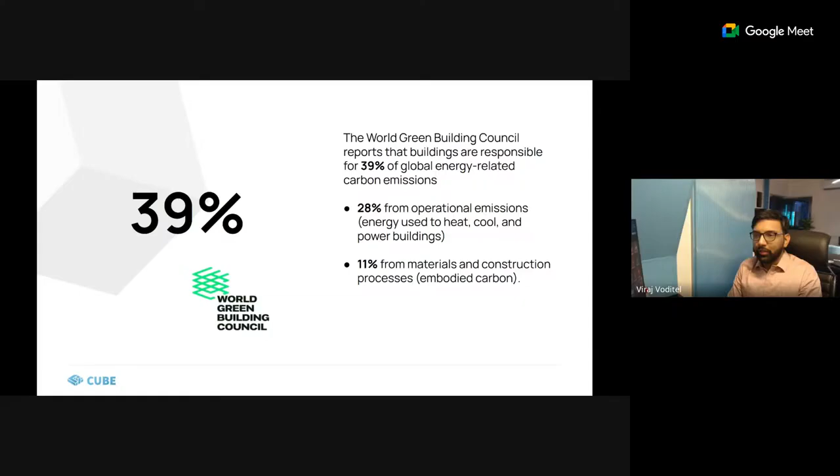So we'll be looking at both these aspects and what role BIM and CDE can play in all of this. So what tools like BIM really help you do is take a data-driven approach. Like we already looked at, the major contribution is happening from this particular sector, and unfortunately, this industry is one of the least digitized. In fact, it's the second least digitized, only after agriculture.

So when we look at some of the emerging technologies, like artificial intelligence, for example, which build upon existing data sets, one of the things that's really lacking in the industry is having vast sources of data. And one of the fundamental reasons for that is the processes themselves are not that digitized. We'll look at both BIM and CDE one by one, but both of these are essentially pointing towards one thing: how we can take a more data-driven approach to this entire challenge and the impact on the environment.

There are of course various ways to measure it, and the end goal could be to make it actionable, just like we measure costs. So I like to relate the impact on the environment also as a cost. When we look at any typical construction project, we are always concerned about the budgets and the monetary impact. But one thing we fail to realize most of the time is the impact that the project is going to have on the environment. So if we look at what cost it has on the environment and make it actionable, that's when we'll really be approaching things from a data-driven mindset.

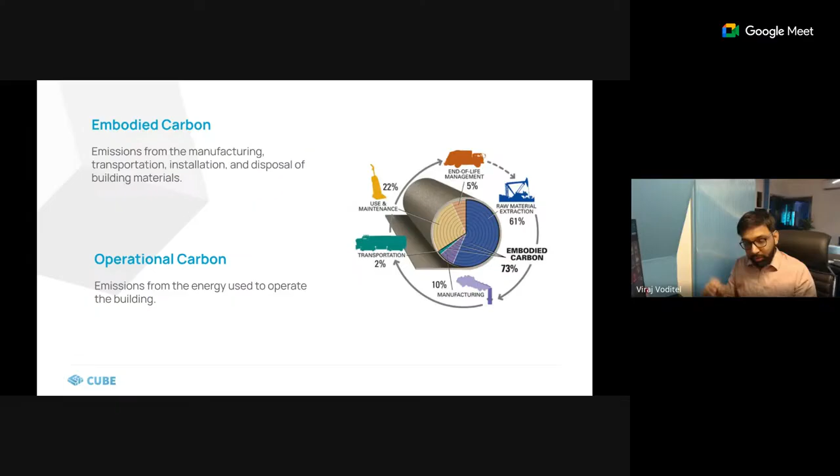It's everything that we call the built environment, and the built environment is everything that is not the natural environment. So anything that is part of the built environment will have similar impacts. So you see the contribution here is lesser from operational carbon and higher from embodied carbon, but if we look at the timeline, operational timelines are definitely much larger, and with more technologies coming in, and people wanting more air conditioning and more electricity usage, the operational phase also definitely has significant impact.

So we can represent the entire life cycle of a project, or how materials get used right from the start to the end. So I thought that this kind of an illustration will really help you visualize that.

There are also certain technical ways to divide these phases, and there are different standards. I'm sure there have been other talks over the past few days that have talked about some of these standards. There are various ISO standards as well. I'll not go into that. I'm just touching upon these so that this builds into the foundation of some of the later concepts that we are going to talk about, BIM and CDE.

So yeah, right from the starting of extraction of raw materials, then transportation. So the transportation and construction could be directly to the site in case of in situ materials. It could be to the factory where manufactured products are getting created, or any prefabrication is happening, for example. So there is a process around that that's happening. Then you have transportation to the end site.

Then you have the actual construction process, which will again take place for quite some time. And these materials are getting procured, these are getting manufactured. Everything is happening in parallel over here. So these are not necessarily sequential steps that are happening. And then, after this particular phase, you have the usage and maintenance of the facility.

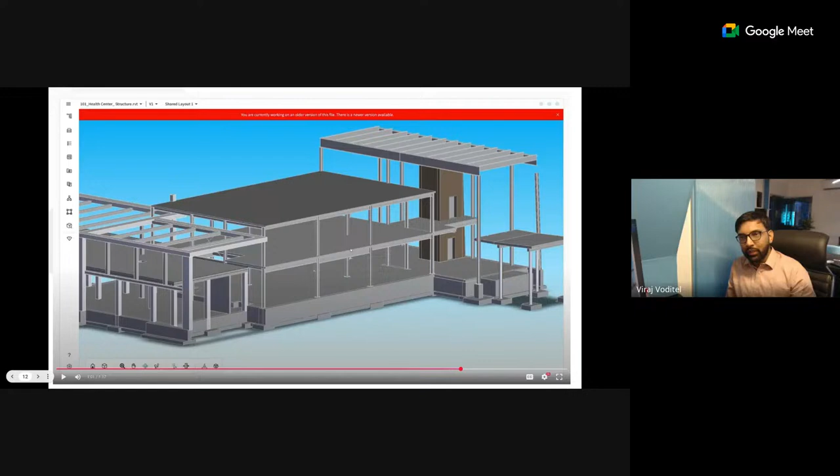The thing that I'm pointing out here is that a common data environment needs to be agnostic. So what that means is that irrespective of what kind of file someone is working with, they should be able to share it with another stakeholder. And nothing should be left to assumption. Things should get translated, be it the model geometry or be it the data that is inside the models. So typically the common data environments which are used in the architecture, engineering, and construction industry should be able to directly visualize these kinds of file formats that are popularly used in the industry.

Okay. Yes, so we can orbit around in the model. We'll look into a bit more details of what more can be done within the common data environment from a BIM perspective very shortly. So let's move on to concepts of BIM. Then we'll dive a bit deeper into how these things talk to each other, how these things are actually integrated.

Again, I'm sure all of you know what BIM is. So BIM stands for Building Information Modeling. Sometimes it's also referred to as Building Information Management as well, depending on what context you read about BIM. It's also referred to as Building Information Model. So, a 3D representation of a project which is information rich. That's what is called a building information model. So it's not just a 3D model.

We've seen 3D models since ages, but the concepts of BIM really came to the fore when the information associated with each and every object in the model got embedded inside these 3D objects, and we had those technologies and software that really helped us do that. So some of the popular tools out there to help create BIM models would be Revit. Revit is a popular example. There are other tools like ArchiCAD. There are various other tools for structural detailing, like Tekla Structures, and so many other tools which essentially help in creating these BIM models. And again, it could be a representation of any construction project.

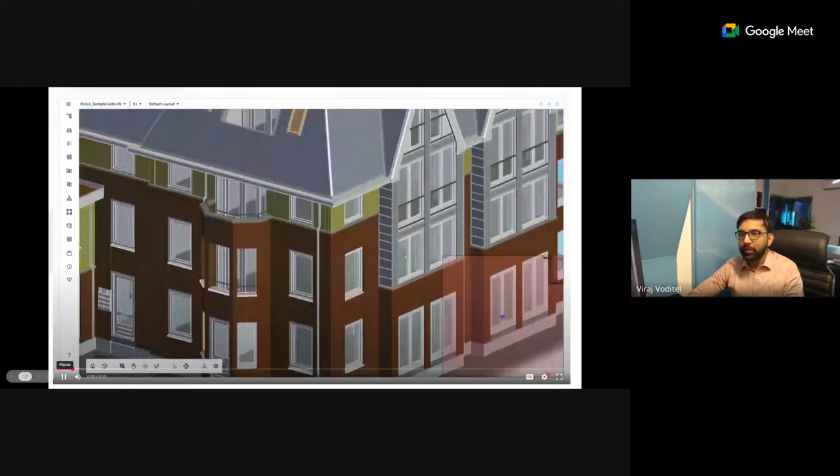Okay. So we look at how all of this information can come together in a common data environment, how we can assimilate things from different sources, and then how we can use that to measure the impact on the environment. So let's look at that through this particular video here. First we look at some of the BIM related concepts. This is a 3D model. As you can see here on the top, it's a .ifc file, and we can zoom in, zoom out, we can orbit around, we can walk around as well.

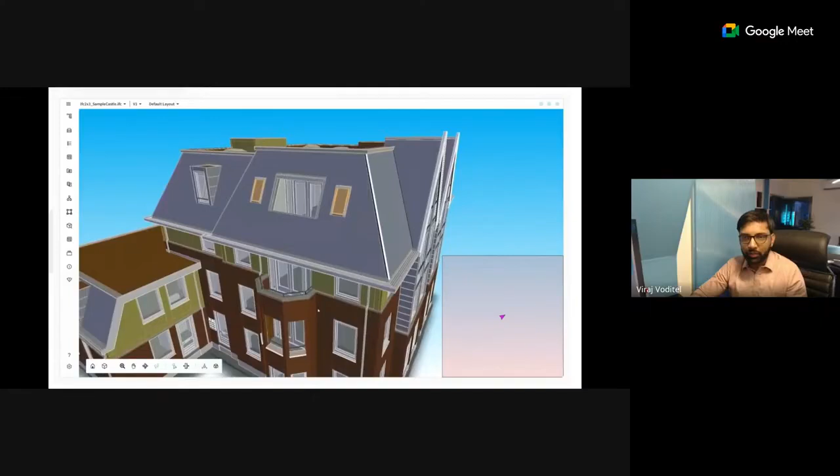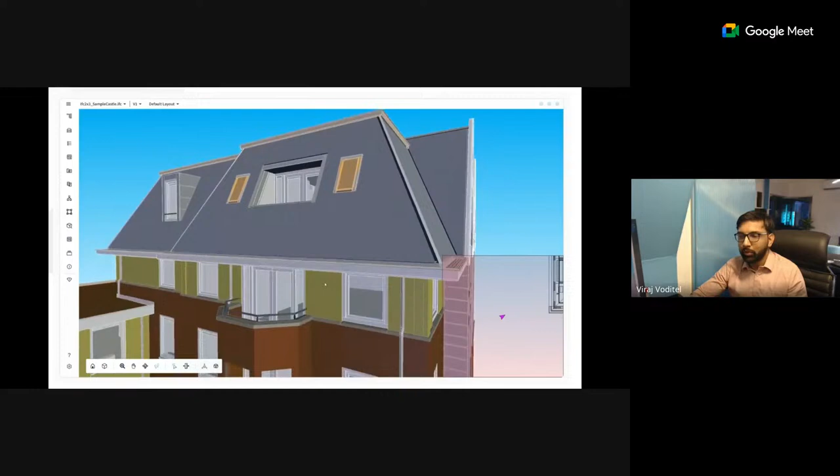This is a very fundamental set of features of what a BIM model looks like, or how a BIM model can actually be navigated around. Just like a video game, you can walk around a project or a design of a project here. Now, these models could possess various different levels of detail, and you can do the estimation of embodied carbon at different stages of the project as well.

What we are looking at here is that we've selected a particular object in the model, and all the information, or you can call it the metadata of that particular object, is directly accessible to us. So you can see things like lengths, areas, perimeters, gross surface area, wall skin thicknesses, so many different parameters that can be modeled inside a 3D model. And a lot of these numbers that you see here are numeric.

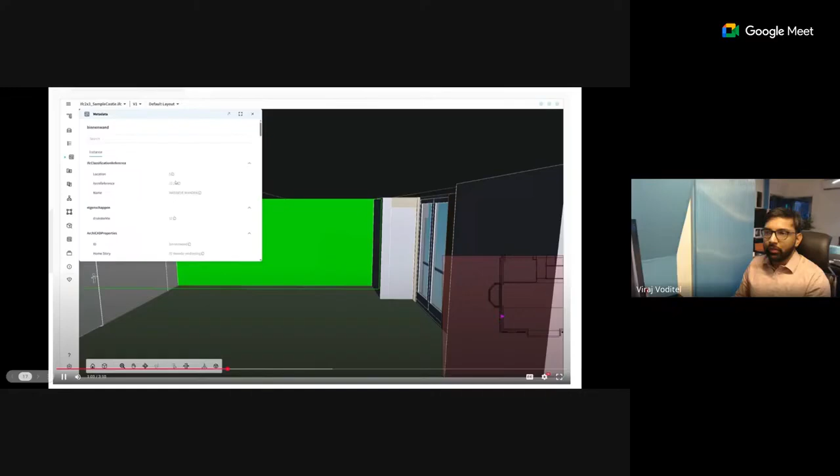So this will give you a good illustration of how this can be used for doing measurements, quantification, or cost estimation. But similar concepts can also be used to do the estimation of the embodied carbon as well. So not just the geometrical information. If I go back slightly over here, you can see there is also information about materials. There can also be information about which user has created this particular object and so on. So it gives you a complete audit trail of the objects that exist in the BIM model.

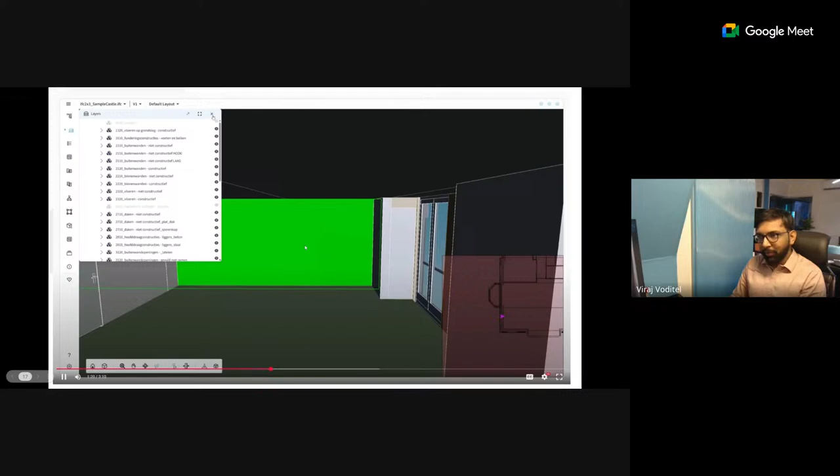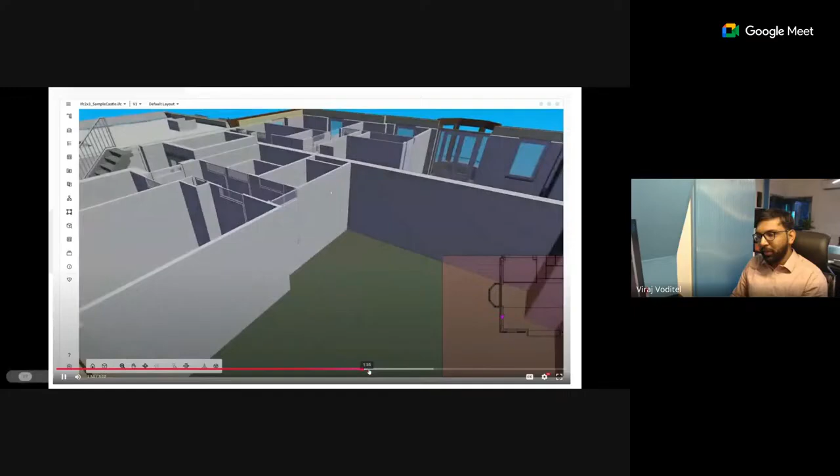Okay. But a lot of times in practical workflows, this information may need to be enriched because it may not have the embodied carbon information, for example. So we'll also look at workflows on how that can be done. I'll just skip a little bit forward here, but the idea is that we can select any kind of objects here, we can turn those on and off, and so on. So you can essentially manipulate and work with building information in whatever way is required.

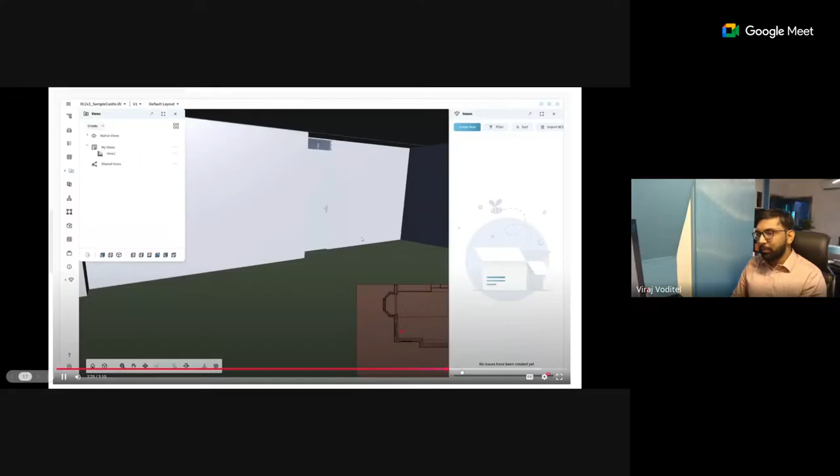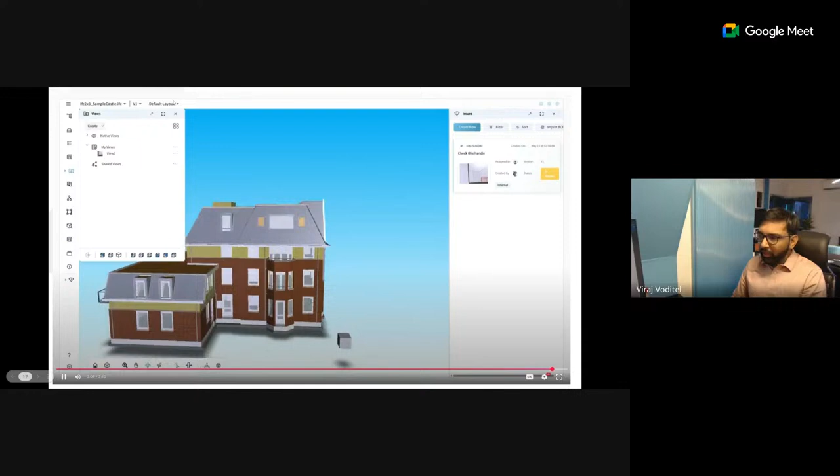And similarly, all of these things are collaborative, so views can be created, snapshots can be created, which could be used to communicate information between these different stakeholders. For example, if I see a particular issue over here, I can create an issue, I can do different kinds of markups. So essentially, it's breaking the borders of communication and helping everyone be on the same page. These are some of the fundamental concepts of BIM and a BIM model on a CDE. Okay, let's move ahead.

Now let's look at the workflow that I wanted to talk about here. We typically start with data sourcing. When we say data sourcing, you have all these different sets of information. You may have 3D models coming in from architects or different design consultants, and then certain drawings being prepared out of those. Then you may have manuals or standards or calculations or methods, etc. So all of that documentation needs to be assimilated in one place. We typically start with that. The workflow that we are looking at here is a BIM-based workflow.

So that's why we will be looking at BIM models, which will form part of your sources. Then you have the next phase, which is enrichment. Now, what this particular stage in the workflow is all about is that sometimes the information that exists in the BIM model may not be enough for you to do your calculations. You may want to put in your own parameters, you may want to perform your own calculations and use those to do your carbon estimation, right? Which is something that is more downstream. So to be able to do that, you need to enrich the model and add that information.

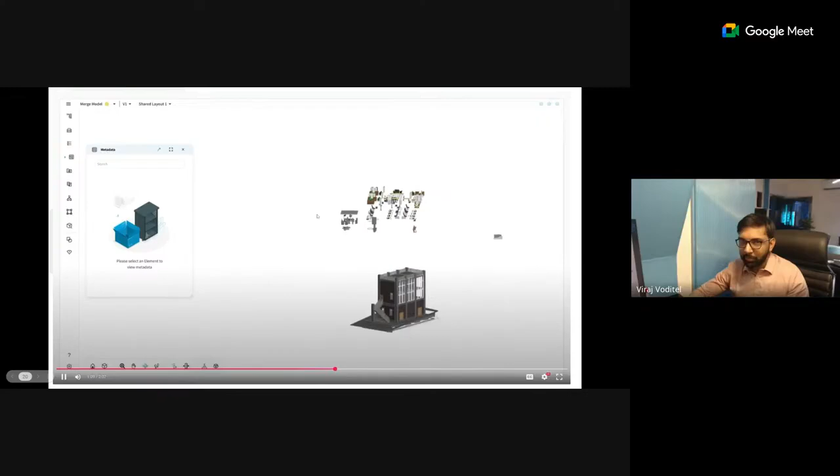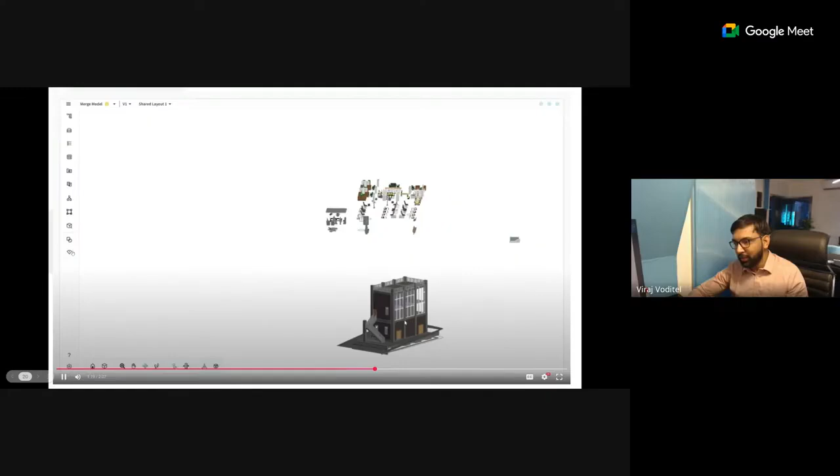Then we can directly open this particular model here as well. So as you can see, I have just merged a few random models here. So there's a furniture model on top. There's an architectural model at the bottom. So one of the things that is typically required to be done, yeah, now all the models got merged, is to make sure that these are coordinated correctly. So if different coordinate systems are utilized, then things get messed up, as you can see over here.

So in the common data environment in Cube, we also have a functionality where we can realign these models together so that they appear in the correct locations as well. So there are certain downstream workflows that are used in construction projects, like clash detection, for example, or even general visualization. If things are not geolocated correctly, then of course it may lead to wrong interpretations.

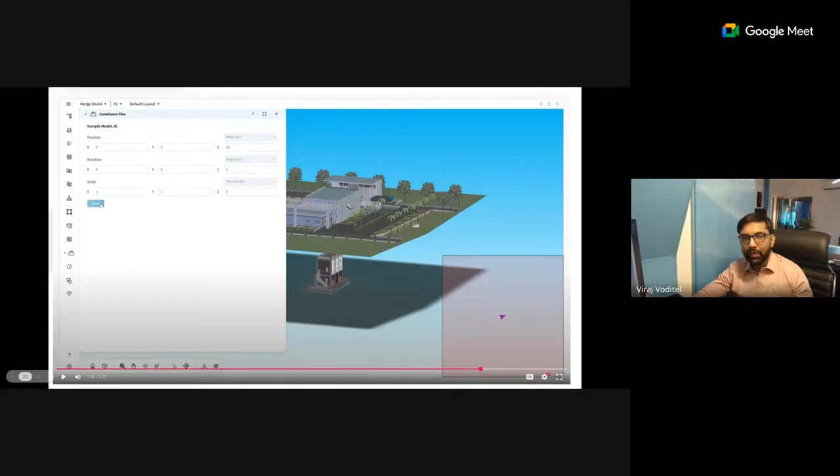So all of these kinds of workflows can be done within the Cube software, so that the data sourcing that you have done, and you have federated all the information together in one place, that can also be validated and checked that everything is correct, and then it can be used for subsequent workflows related to, let's say, estimation or clash detection and so on.

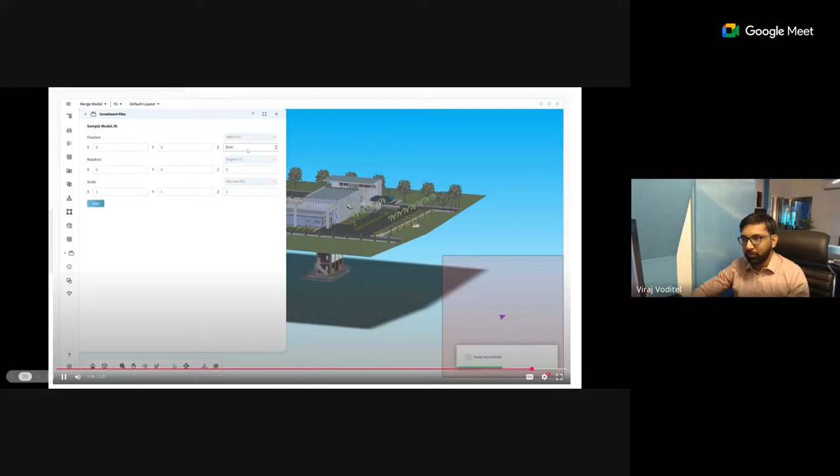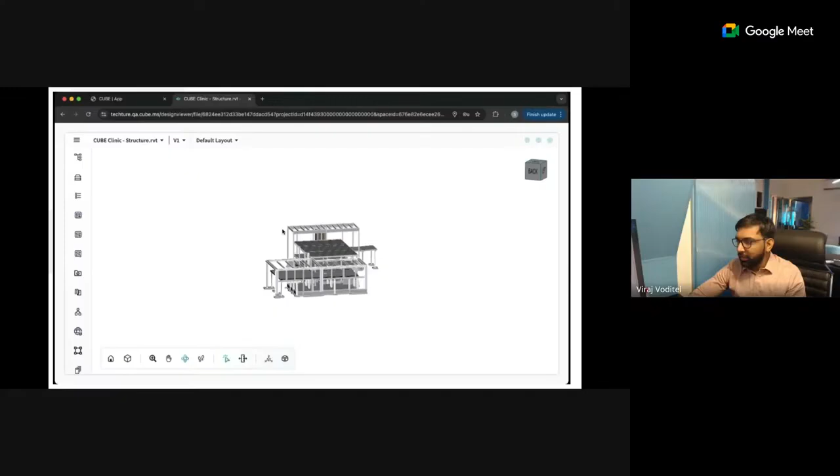So yeah, I'm just updating a few parameters here, like the Z of this particular model, and as you can see, it's moving here in real time. And you can save this information so that next time onwards the models are geolocated correctly. Yes. Now what we'll be looking at is, yeah, we have opened a particular model here.

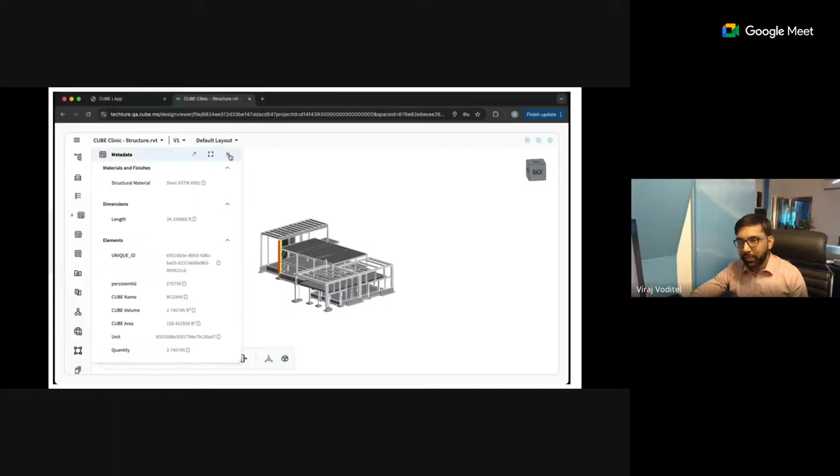Yes, so we saw that all the different metadata or information that is embedded inside that particular model also is available in the software, right? But sometimes you also want to add certain custom metadata. So here, what we have done is we have added a section called environmental parameters, and there's a field for embodied carbon that can be added. So this could be a numeric field, a text field, or a date field.

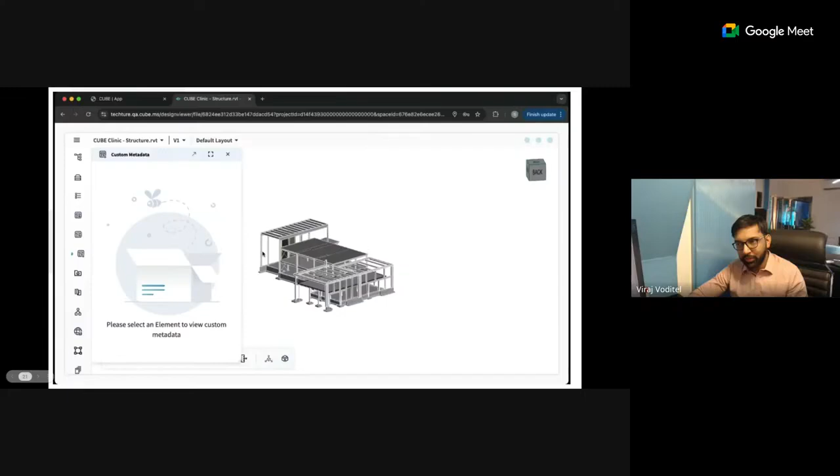So what the platform enables you to do is put any kind of such information into your model objects, which may not necessarily be available within the model by default. So this is the model enrichment stage, which I was talking about. And then what can also be done is we can create these kinds of queries. So think of it like a search engine for your model.

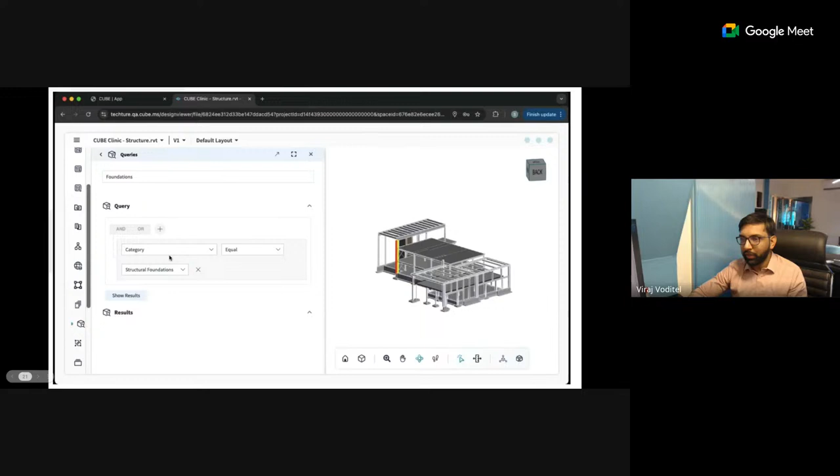So we can define different conditions. It could be a very simple condition, like I want to find all the objects of a particular category. So category equals, let's say, structural foundations in this case. So we can click on show results, and it will isolate those objects for you and also list them out on the left.

So essentially, your BIM model is nothing but a giant spreadsheet of information that is embedded inside the 3D objects. So what you're doing here is performing searches or queries on top of that. We also have certain AI-based algorithms where, even if you type it in simple language, it will return these results for you. Or you can build complex queries using the query builder, using the and/or rules.

So why is this useful? What we are looking at here is more into the process of estimation, where we want to filter out certain objects and then do the enrichment. For example, all of these are, let's say, created from M30 concrete, and for all of them we want to enter a single parameter, like the embodied carbon. We added it for just one element in this case, but suppose we want to do it for a specific set of elements all together.

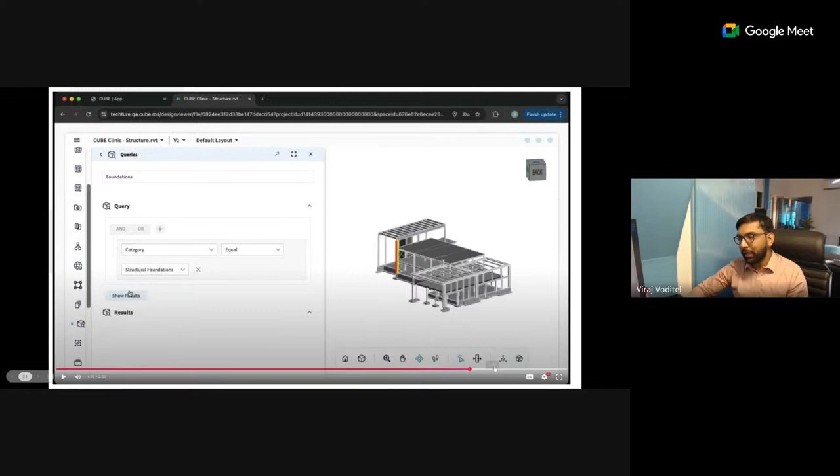So you can filter it by columns on the first floor, or plinth beams, things like that. So with these kinds of queries, you can quickly filter your model and enrich it the way that is required. Yeah. So as you can see here, for all of these objects together, we have added this particular value. So this was the model enrichment phase.

Then the next thing that we want to look at is how we can associate this information that we have added. It could be information that is already present in the BIM model, like volume, for example, or this embodied carbon that we are adding over here. So what we have done in this case is very similar to how a bill of materials or a bill of quantities would look. But instead of a monetary currency, we are looking at embodied carbon here.

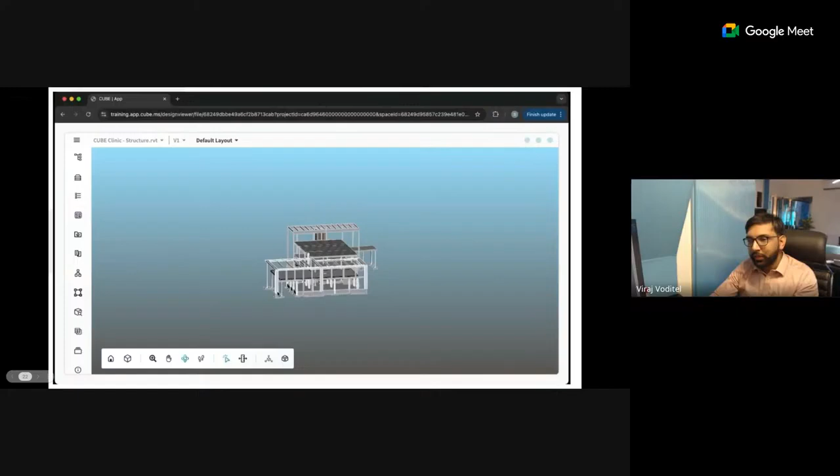How these rates and amounts are going to appear here, I'll also quickly dive into in this video. So what we have done here is that we have linked or associated the files. It could be one file or multiple files. Here, to keep things simple, we have just associated one file. And the query that we looked at in the previous video, we're just going to be creating a similar query here. Yes. And I'll just skip forward.

Then what can be done here is that you can link this rule. A query is nothing but a rule. So you can link that particular rule to takeoffs. Why we usually want to do this in BIM workflows is that BIM models change very frequently. There are new versions coming in, changes coming in, and you don't want to do that exercise repeatedly. So what can be done here is,

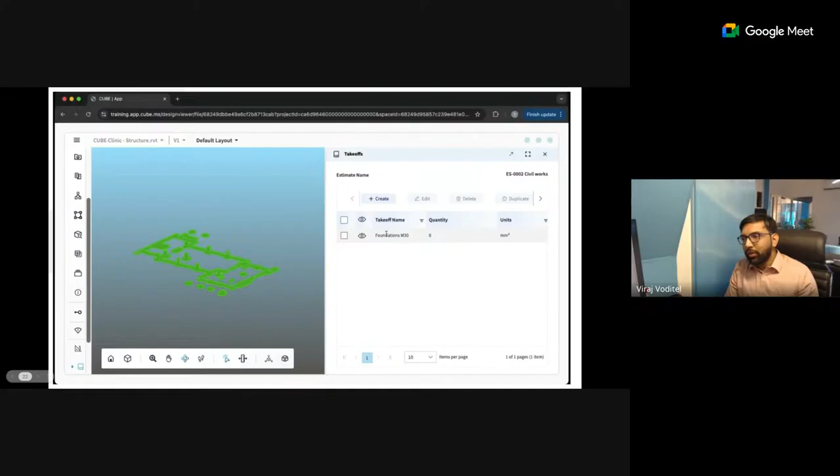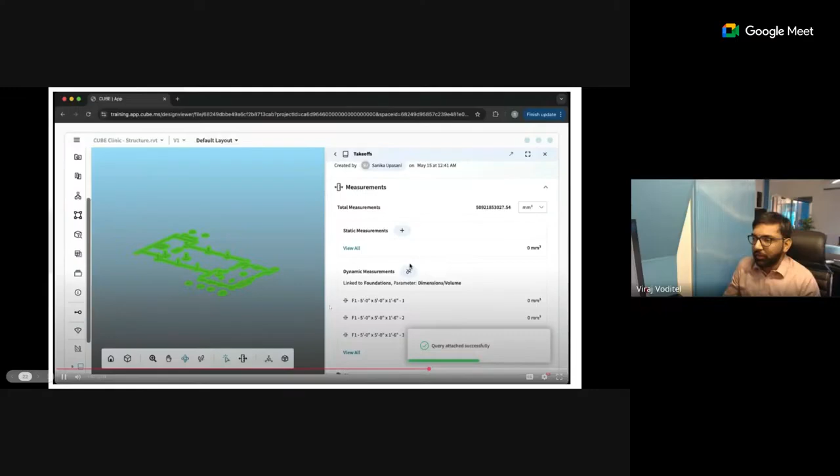so what we are doing here is we are attaching the query that we just created, and we are associating a certain parameter. In this case, we are doing volume, and it has extracted the entire total volume, and we can convert it into whatever unit we want as well. And we can associate this particular set of objects to an item in our bill of quantities.

So if I just forward it a little bit, this 50.92 is now associated with a particular item over here. As you can see, it highlights it in gray, which means these quantities are actually coming in from a BIM model. Okay. And the unit is also captured. Now we look at, once this kind of information is extracted, how we can arrive at a rate.

One second, let's look at this part first. Yes.

Yeah. So for a particular item, you may want to define that for 1 cubic meter of, let's say, M30 concrete, how much is the impact or how much is the embodied carbon it has, based on its constituent materials, based on transportation, based on placement, vibration, formwork attribution, and then arrive at this particular rate. So just like we do a rate analysis for costs, you can do a rate analysis for embodied carbon here as well.

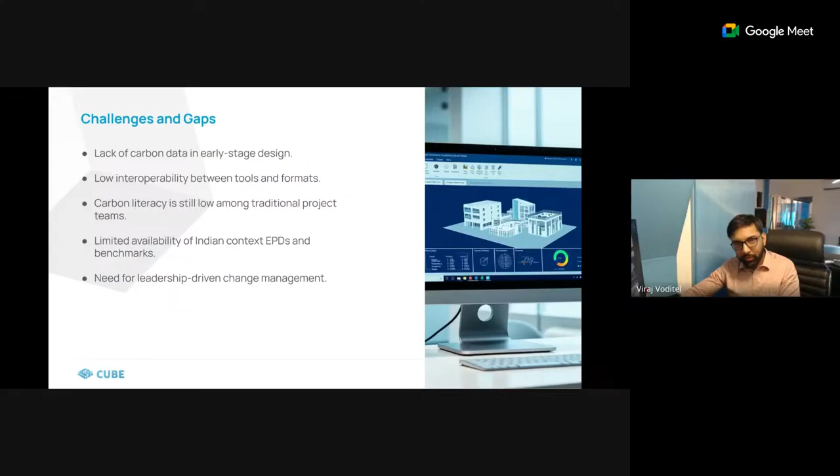And as with any kind of new changes that come in, these need to be top-down driven. It just cannot happen at grassroots level automatically. Things need to be driven from governments as well, through mandates, and through project owners, through their consultants, and then to the contractors, so that everyone is on board with these kinds of workflows.

So I'd like to end with what the future looks like. So things are rapidly changing in the technology domain, right? So the way we visualize, the way information... So I remember a time when, whenever a BIM model was updated, we used to export spreadsheets out of it and then manually patch together an estimate. Now things have so rapidly changed. We looked at an example of how you can link information from the BIM model in real time dynamically to the estimate. Similarly, you can link that to dashboards as well, so that if any change happens in real time, that is reflected in the dashboards.

Then you have artificial intelligence coming in, be it generative AI or be it algorithms for analysis. There are so many things happening at a very, very rapid pace in this particular space. So we are looking at how all of this estimation that I illustrated in the form of a video, the same thing could actually be done by an AI agent as well, provided the right set of inputs and programming has been done.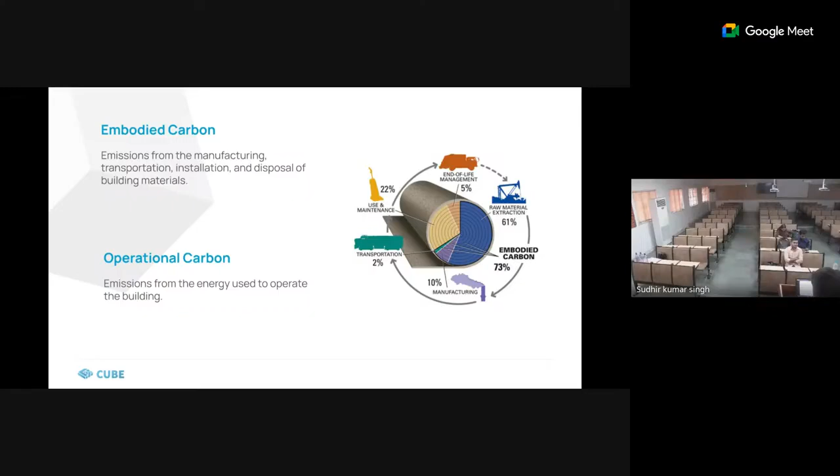So whatever processes are being employed here are to improve the efficiency of construction and reduce the impact that our processes will have on the environment. I'm not an expert in this particular topic, so I'm not very sure what the concept of break-even would really mean in this context. Thanks for taking that. I totally agree, it's about the delta change we are trying to bring to the project. Right. It's more about the delta here rather than absolute impact. Yes, thanks very much.